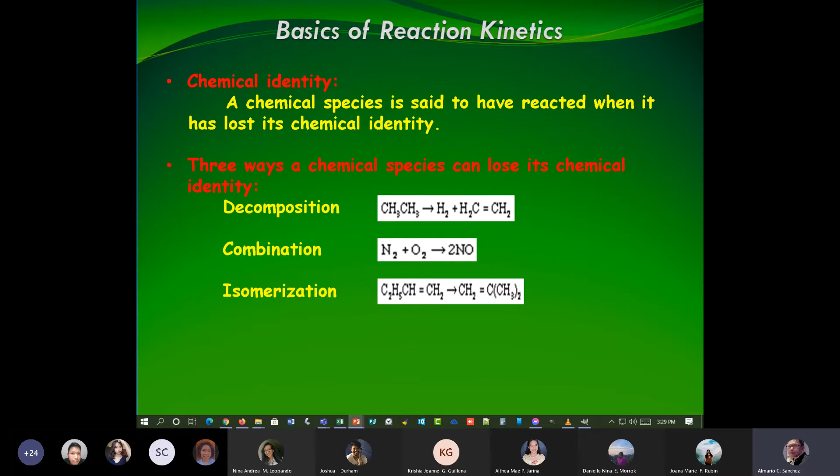So a chemical reaction is a process that leads to the transformation of one set of chemical substances to another.

How can we count them? We are going to use moles. Grams are also important. Then we have molar mass, then Avogadro's number. So these are the things we are going to deal with: grams, moles, molecules.

Remember that before reaction is the lowest picture. It undergoes reaction and then we have what is called after reaction.

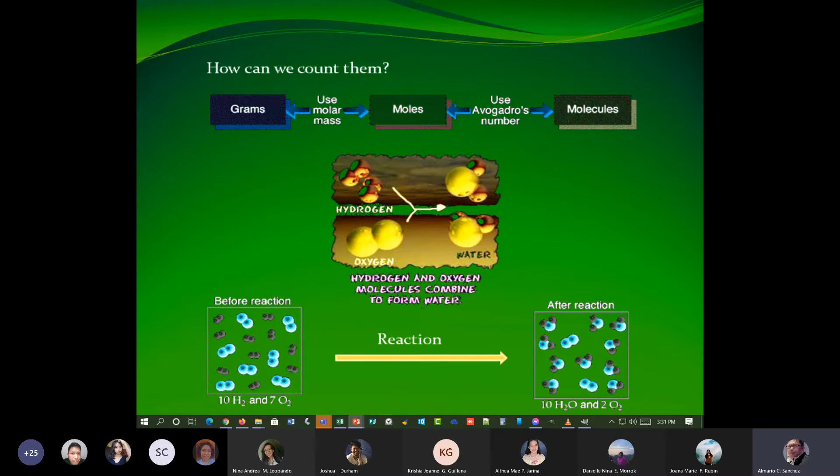So the basics of reaction kinetics. For example, we have A forming B. In other words, our reactant is A, and our product is B.

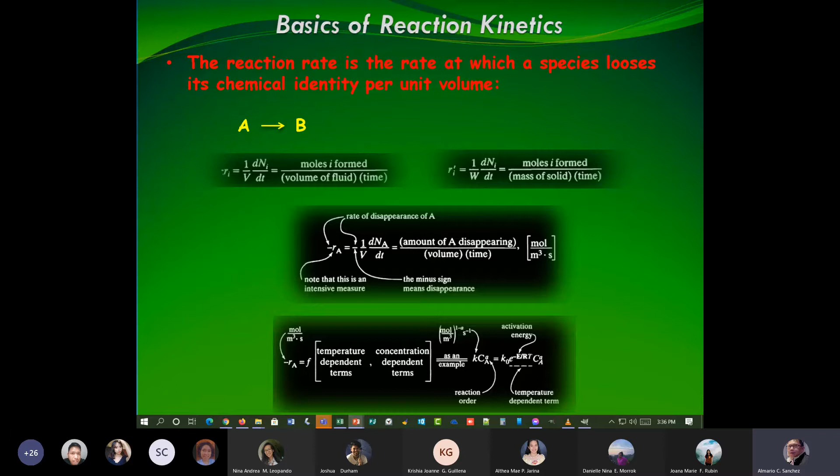Remember that the activation energy is the energy needed for a reaction to take place. Okay? And remember that the higher the activation energy, mas lisod ka maka produce og reaction, no? Imo sa na siyang paubson, pagamyan ang iyahang value sa atong activation energy. Okay? And it is temperature dependent, no? So, mao niya pinaka equation niya. We will derive that later on. No? Okay.

So, I have here embedded some videos. Duha ni ka video, siguro mga 30 minutes na siguro. Okay. About chemical engineering. Then later on, mobalik ta sa atong reactor, no? Okay, which is part of our discussion.

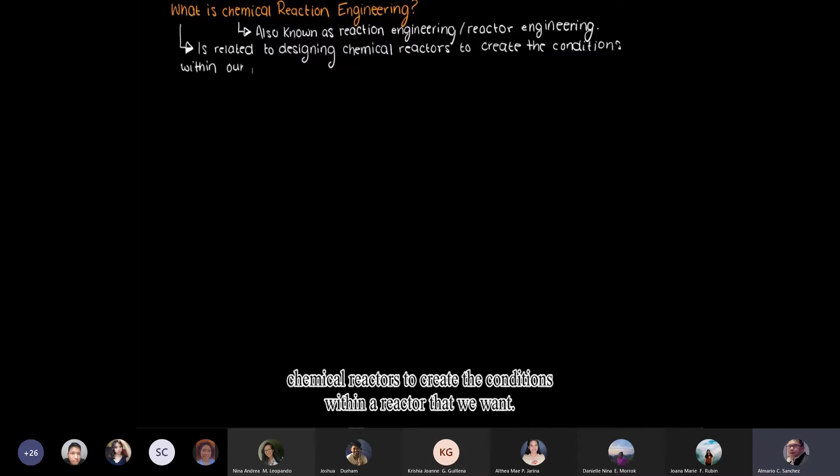Hi everyone, in this introductory video, I want to talk about what exactly chemical reaction engineering is and why learning this topic is important. This course is also sometimes known as reaction engineering or reactor engineering. So what exactly does chemical reaction engineering mean? It is basically the study of reaction kinetics, the rate and direction at which a reaction occurs, and the study of the reactors in which the reactions actually take place.

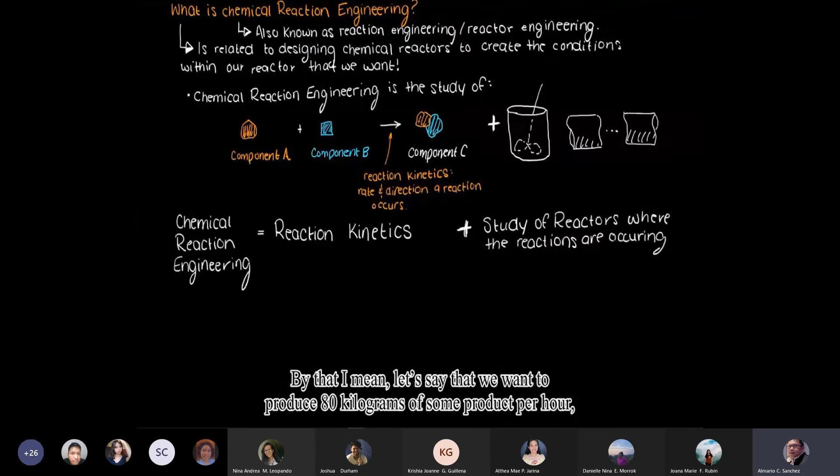Let's say that we want to produce 80 kilograms of some product per hour. What kind of reactor should we use? What temperature so that it doesn't explode? The primary focus is reactor design, such as will a certain exothermic reaction melt our reactor. Economics are also a huge part. And how do we scale a process from a pilot scale to an industrial setting?

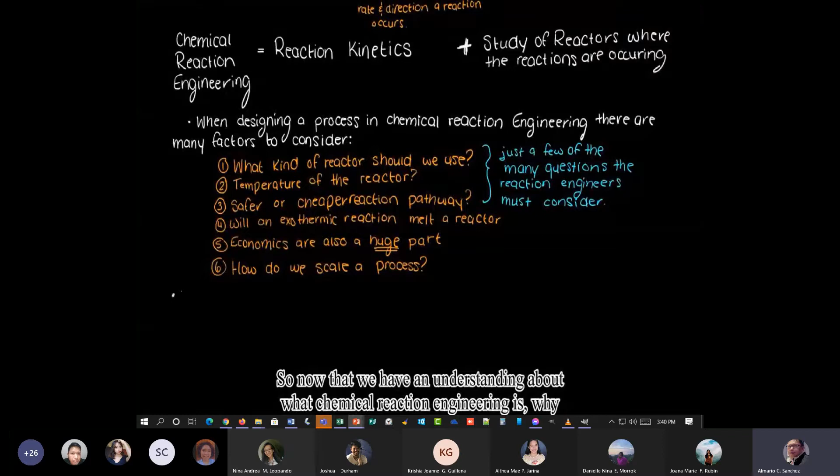So, now that we have an understanding of what chemical reaction engineering is, why is it important to learn about? Well, if you're watching this video, you're likely an engineering student, an engineering professional, or someone else interested in learning about reactor engineering. But why is it important?

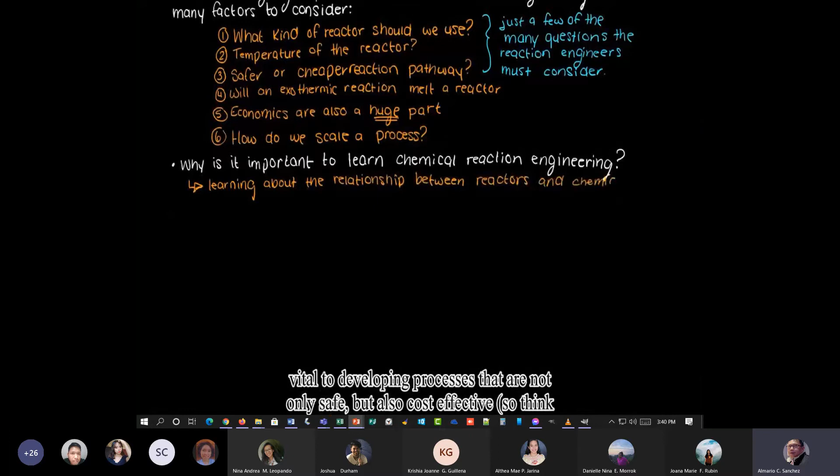Learning about the relationship between reactors and chemical reactions is vital to developing processes that are not only safe, but also cost effective—think heating and cooling costs—and has minimal environmental concerns. Does our process produce some environmental degrading byproducts?

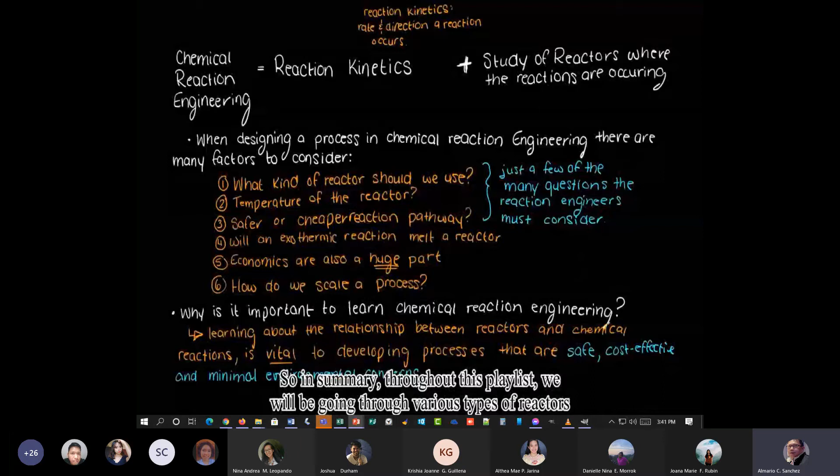In summary, throughout this playlist, we will be going through various types of reactors and how we can size them for certain desired products, through identifying and applying appropriate reactor design equations and methods. There will be lots of interesting topics covered throughout this playlist, and by the end, you should have a strong understanding of chemical reaction engineering basics.

Thank you for checking out this video, and I hope it helped your fundamental understanding about what chemical reaction engineering is, and inspires you to continue learning about this topic with us throughout the duration of this playlist.

Hi everyone, in this introductory video, I want to talk about what exactly chemical reaction engineering is.

What's up, guys? It's time to start our course in reactor engineering. We are now in block number 1, which is essentially chapter 1 on your book, Fogler's book, Elements of Chemical Reaction Engineering.

We're going to see the introduction and the molar balances. We're going to explain what's a molar balance, how to do it, how to apply it to a reactor, and essentially we're going to find out some equations or design equations for those reactors.

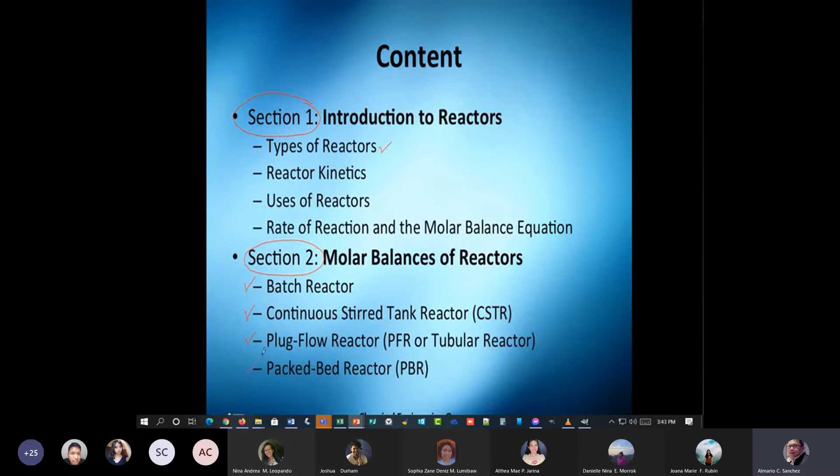In the second video, we're going to jump to molar balances, which are done essentially in batch reactor, continuous stirred tank reactor, plug flow reactor, and packed bed reactor. Right now, we're going to see just the introduction to reactors.

So the first thing I want to let you know is what's a reactor. I tried to look out for many definitions, but I think the most common sense definition is this one: it's an equipment used to carry on a chemical reaction.

So essentially, if you have a mixing unit and you're not doing a chemical reaction, that's not a reactor. But if you are carrying on, say, A turns into B, then you are doing a chemical reaction, therefore that's a reactor. And actually, there's also types of pipe.

If you're using a pipe just to transport material and you're not transforming A to B, technically speaking this isn't a reactor. Of course, we don't want that—we want this pipe to transport A into, of course, only A. We don't want transformations. But technically speaking, if you have a device or equipment that carries out a chemical reaction, then you have a reactor.

So yes, chemical engineers design reactors to maximize net present value for the given reaction. That's kind of fancy. What does that mean? It means essentially you want to improve the reaction in...

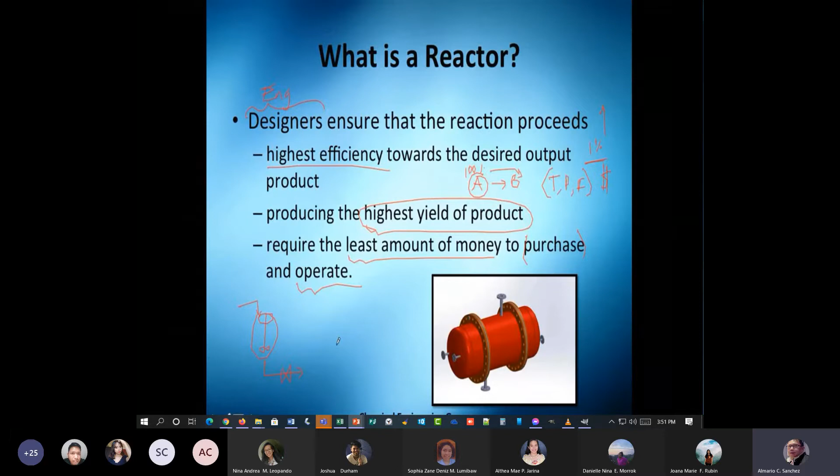And you need the least amount of money to purchase or invest and to operate, because one thing is having the reactor, another is actually operating it. You'll need someone there taking care of it, someone who cleans, someone who operates and controls temperature, heating, cooling, piping, pumping, compression—all that stuff behind the operation.

So why do we need reactors? Well, we want to convert material. That's what I love about chemical engineering: it's about transforming, converting, producing materials which aren't that useful, or maybe they are useful, but you want to turn them into something else.

So let's say you have this low-value material, and I love it because you use your knowledge, your brain, and transform it into more profitable materials. That's why I love chemical engineering—let's do some magic with our knowledge and get more money with that.

We do it because we want a specific unit for that operation, so at least we know that this tank is where our chemical reaction is taking place. If you're in this chemical plant and you have a problem—you're not getting the yield or conversion you want—you go to the reactor, you study it there, you don't need to check this piping or that one. Maybe eventually, if the reactor is fine, you'll need to check elsewhere, but the first thing you want to do is go directly to the reactor.

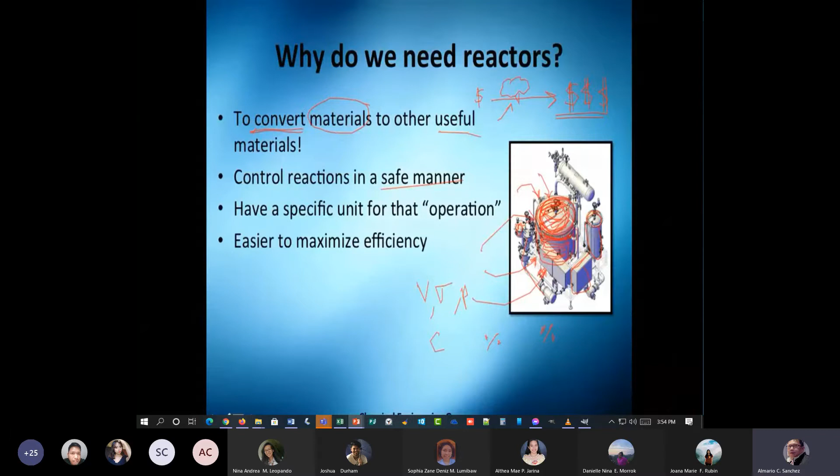And the thing here is that it's easier to maximize efficiency, because then you work fully on this reactor and not on the whole plant. You can change the volume, temperature of flows, pressure of flows, concentration—all those process variables that affect the conversion rate or yield. So that's pretty cool, because you can change levels, temperatures, inlet conditions, all within this specific unit.

So the next thing we're going to see is the types of reactors. There are many types of reactor, or ways to classify them, so I brought you the most common ones, the ones you're going to be using. For example, batch, or semi-batch process, or a continuous process.

This is in general when you have a plant operating all day, all year long. You transform A to B in this reactor, and you have a flow of 10 kilograms per hour here, and you take out 10 kilograms per hour of B. A batch is essentially just a tank that you fill up, let time pass, it reacts, and you take it out. A semi-batch is a mixture between a batch and a continuous process.

That's one form. Another type of reactor classification is whether it's catalytic or not catalytic. When it's catalytic, as the name implies, you have a catalyst. When you don't have it, it's a non-catalytic reaction.

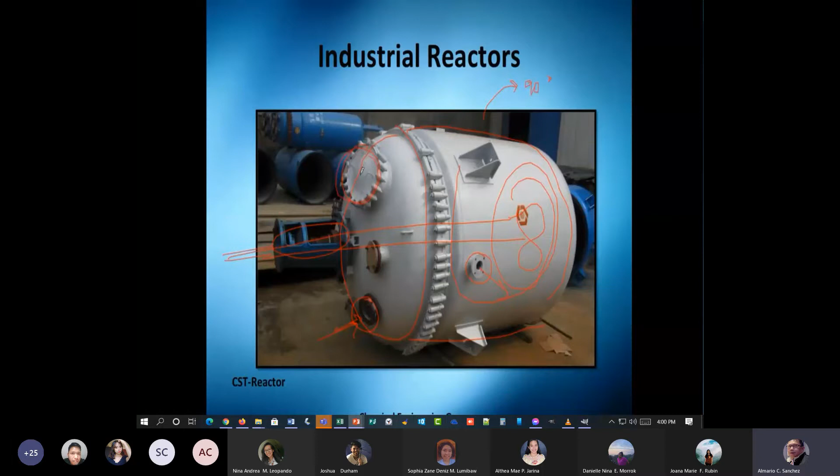As you can see, it's a continuous stirred tank reactor because you have the inlet here and maybe the outlet — I don't see the outlet, but it should be there. And this is the manhole. What's a manhole? It's essentially a place where a man can go in to clean it, or check if there's something stuck.

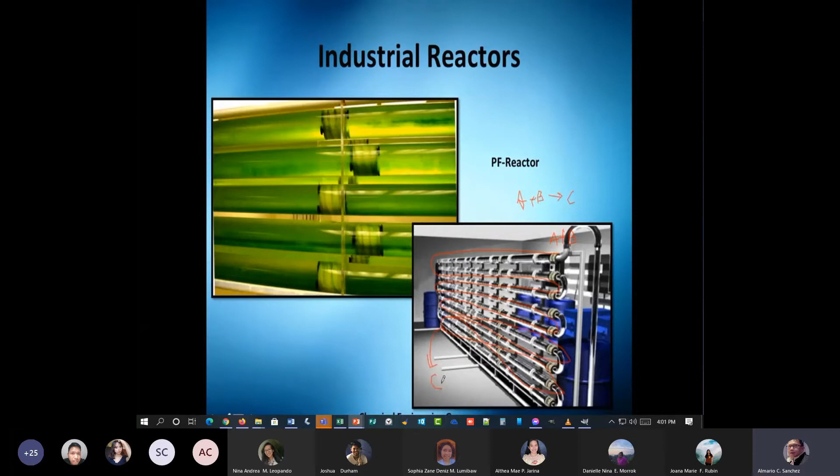The same here. Now we have a different arrangement, and you actually cover this, so maybe it's more aesthetic. Maybe if you're selling the reactors, you want to make it as aesthetic as possible. But actually in the chemical industry, you're not looking that much into aesthetics. You are more into usefulness, efficiency, and that.

And it makes sense, because if I were an engineer, I wouldn't care that it is not fashionable at all. If it works, it turns my material A into B, and I can sell B way more expensive, I will not care about the fashion elements.

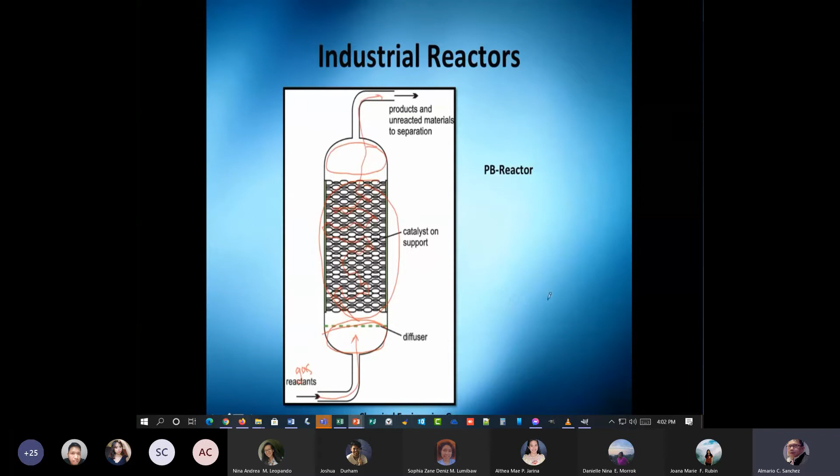And then we have a packed bed reactor. It's essentially the same tank. This is the diagram, because if I give you the photo, you will not be able to see the packing, of course, because it will be covered by metal walls. You have the reactants, you take them here, maybe this is gas. And this is a catalyst. You have the catalyst on this bed or this solid part, so they react, they make their reactions, and you take out the products. It's not as difficult or complex as it seems. It's so easy.

And obviously it depends on what your requirements are on pressure drop. You want to increase conversion, to increase the surface area. There are many things that you might want to consider. It's not just about, okay, just pull them up here.

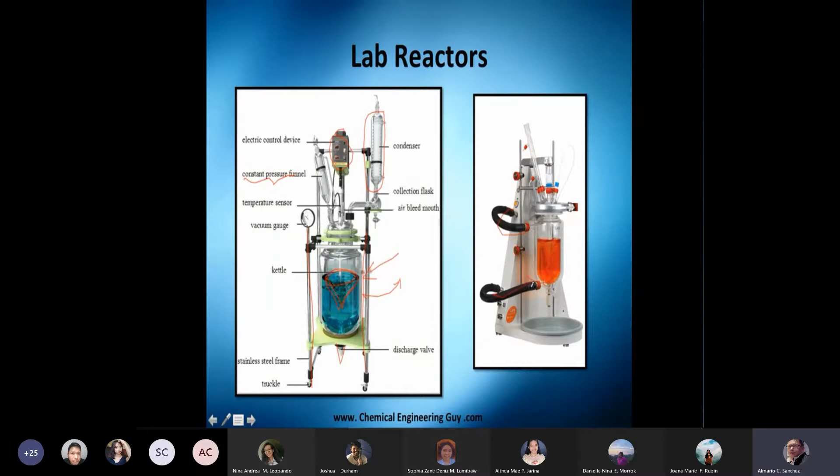And as you can see, this is done to improve the reaction. So if you can improve them in the lab, you can maybe improve them at the larger scale. Normally you use chemists or even chemical engineers to improve the reaction. The thing here is that you want to improve the yield, or maybe you want to lower temperature or heat requirements or viscosity, so you get lower pumping costs. All these things that might interest you are here.

And normally you also want to model that. So if you can model the lab experiment, you can see the transport phenomena. Let's say this is the heat or temperature profiles. These are momentum or velocity profiles; you can see all the agitation here. And maybe this is the mass profile, how they're changing.

Let's say the blue one is A and the red one is B, and A is turning into B. So you can see how at the beginning you have a lot of A and at the end you have a lot of B, which makes sense because you are transforming A into B. So that's why you also get lab reactors. You want to improve and model and eventually get a better version of your real reactor in the chemical industry.

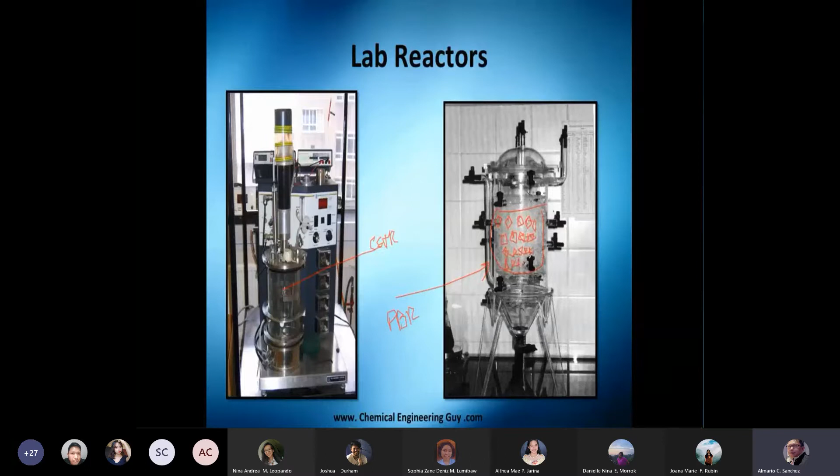So same thing here. You can recognize them. Maybe this is a small-scale CSTR, and this is a PBR, of course. You have this packed bed. As you can see, you have a lot of pellets, so I'm guessing this is a packed bed in which you feed the gas here and take it out. So yeah, same thing here. Actually this is also a packed bed reactor, but you can only see the packing here, you need to be watching closely. And essentially that's lab reactors.

We're going to see a new trend, which is micro reactors. Essentially, as the name says, micro, 10 to the minus 6 meters. So why do we use this? Because at the micro scale, we get many good things. You can control better. Essentially, it's all about transport phenomena.

Hopefully you've seen that before, because you get laminar flow and you get more pressure control and heat control and all that stuff. And yeah, you can see another here. You get better control of the reactants. And the thing here is, once you've got this microreactor working as you wish, you can get maybe 10 to the 6 units, which is about 1 million, or maybe you just want 1,000, depending on the flow, of course, and your requirements.

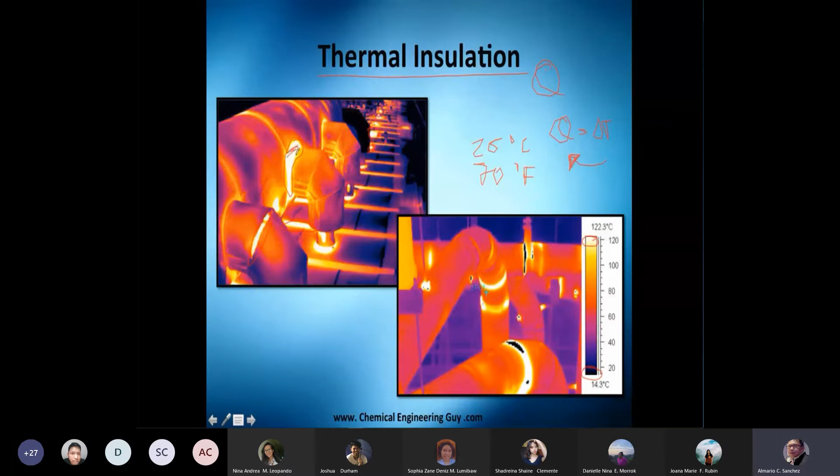You don't want high temperature, because it implies a difference in temperature, and that means you're going to lose heat to the ambient air. You want to avoid all these little points here. How do you do that? By thermally isolating the reactor. Instead of losing all the heat, you cover the reactor, the inlets and all the piping, and you get this kind of arrangement. All these pipes are covered. This is not metal, this is isolating material. And you also cover the heating vessel.

What type of material is used? They use a lot, but this is how they look: foam-like or asbestos-like, and you cover it with aluminum. That's essentially thermal insulation. I remember going to my first chemical industry, and I thought these were the whole pipes. There are actually pipes inside, but you've got this isolation inside the metal. So the actual pipe may be this size. Even though you see a huge tube, there's a small tube inside because it's super hot, with all this material around it.

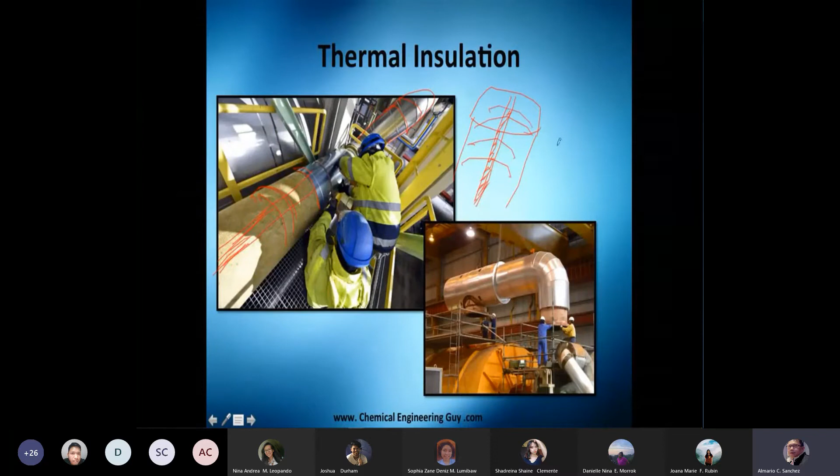So that's an overview of thermal insulation, so you know there are isolation problems in reactors. If you want to keep the same temperature, isothermal, you will need to take care of that. Or if you simply don't want to spend that much money on heat requirements, you will need to buy some isolation material. And that's everything for section number 1.

Let me tell you what we've seen so far. We saw a small introduction to reactors, types of reactors, reactor kinetics, and the uses of these reactors. What's left is section 2, molar balances of batch reactors, continuous stirred tank reactors, plug flow reactors, and packed bed reactors. We're going to see the mathematics and derive an equation to help us model these 4 reactors.

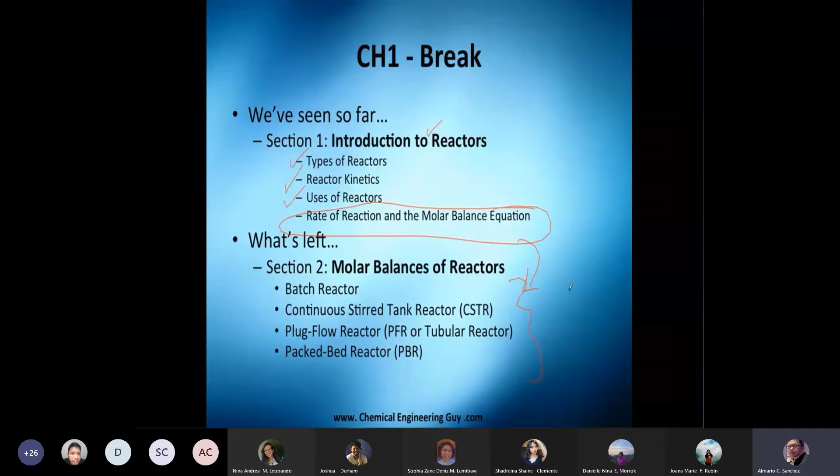What's up, guys? It's time to start our... Okay.

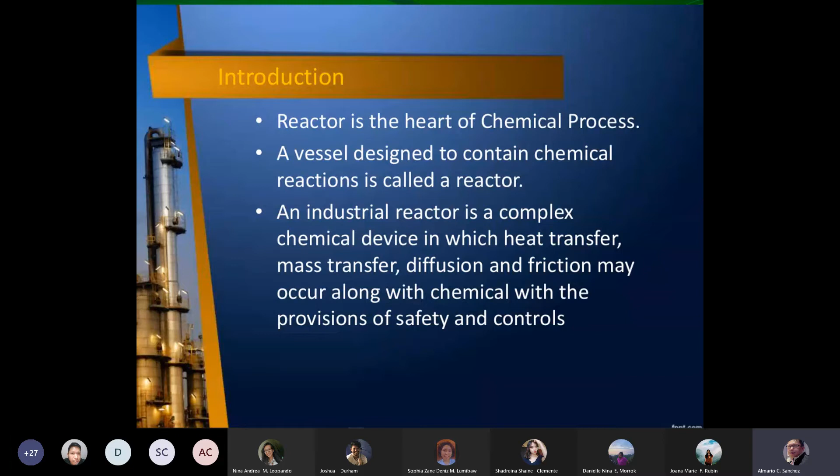So the basic principle is that all chemical processes are centered in a chemical reactor. The design of a chemical reactor is the most important factor in determining the overall process economics. So just bear in mind that you are called a chemical engineer because of these things. You know how to make a chemical reactor. You know how to design, not only designing by name, but you design it for the purpose that you profit from it. You can make something that is not useful into useful, and also it is safe. It is a safe reactor.

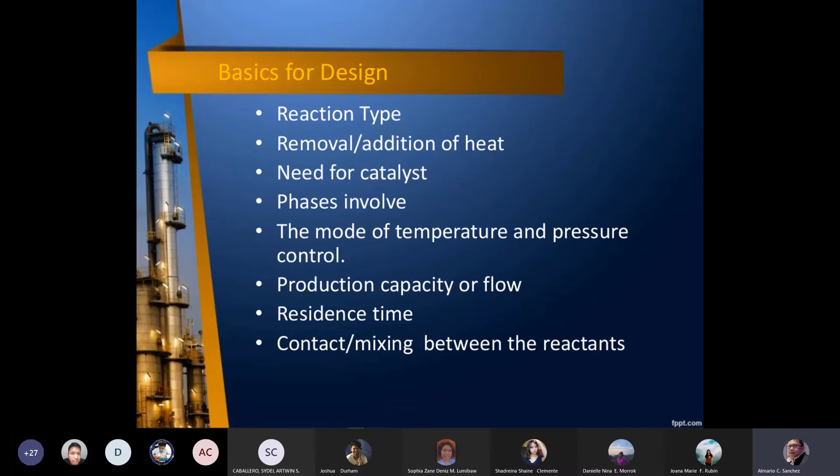So kini nga mga basic need na to for the designing of a reactor. Actually this is only the basic. There are many things to consider pa ang thermodynamics niya. Kinahanglan nato na.

So the reaction types, we already know this from general chemistry. We have the direct combination or synthesis reaction, which is A plus B equals AB. Then the chemical decomposition or analysis reaction, reactant is AB, and then it decomposes into A and B. We are talking about this reaction type because this is one of our bases when we design a reactor.

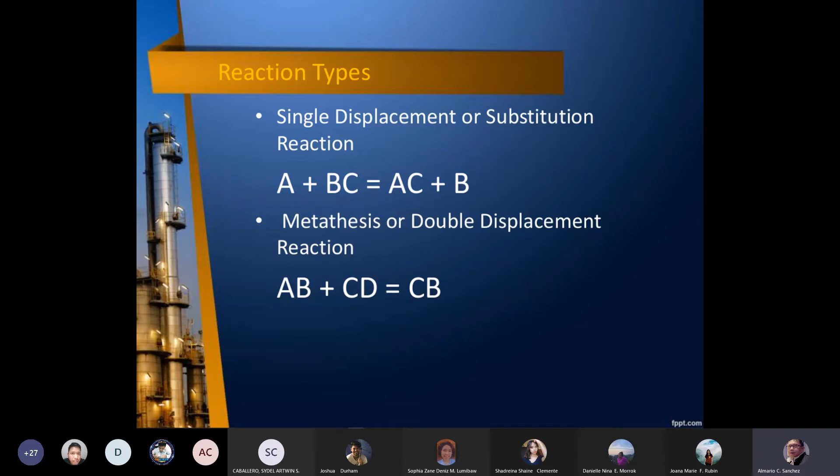Then we have single displacement or substitution reaction. So we have an element A and a compound BC. Then by single displacement or substitution, A combines with C, and then B. Then metathesis or double displacement reaction, AB plus CD reactant equals CB plus AD. Siguro ang importante nga part is the CB only. The AD is not important.

In addition, the basic data includes thermodynamics, heat and mass transfer characteristics, physical, chemical, and thermodynamic properties of components taking part in the reaction, corrosion, aeration, characteristics of any potential hazard associated with the reaction system, and the reaction rate. Very important ang reaction rate. Unsa siya kakusog, unsa siya kahinay. Basig usa ka tuig pa maka-produce ang imong reactor.

Then we have to consider also the endothermic or exothermic reactions. Endothermic describes a process or reaction that absorbs energy in the form of heat; exothermic releases energy in the form of heat, light, or sound. Then we are going to solve also for the change in enthalpy and the change in entropy. One thing very important: as much as possible i-avoid nato ang exothermic reaction. You will understand later why.

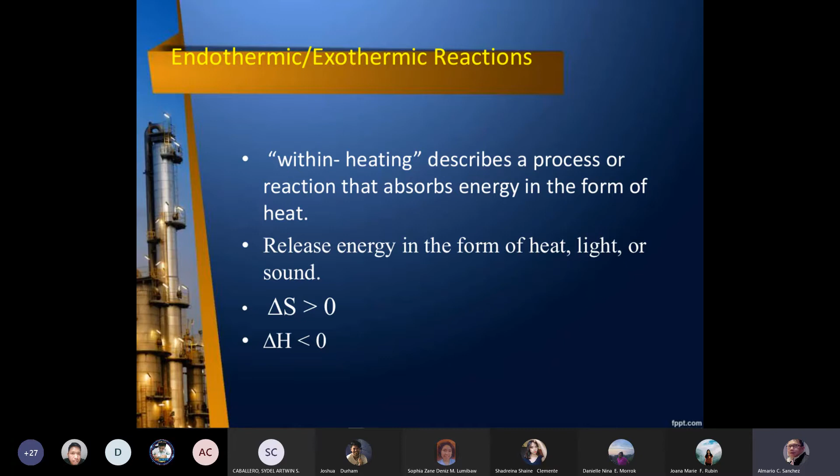Now reaction rate, the speed at which a chemical reaction proceeds in terms of amount of product formed or amount of reactant consumed per unit time. So you have to remember these things. Importante ni siya, regarding the kinetics. Kay mao man ni ang pinaka basis nganong kana nga reactor atong gamiton, nganong batch type, nganong CSTR, nganong PBR atong gamit. Depende na lang sa reaction rate.

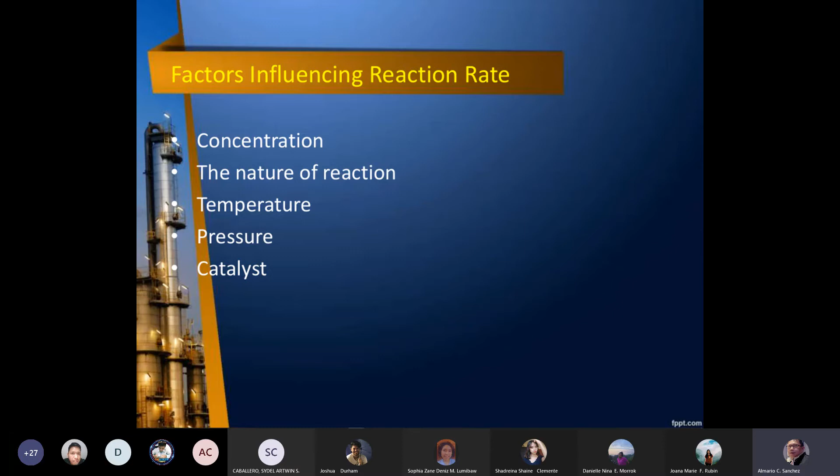Factors influencing reaction rate: concentration, the nature of reaction, temperature, pressure. Ang catalyst, option lang ni siya. Catalyst, gamiton lang nato kung dili mo suffice ang production sa atong need. Remember that using a catalyst, that is money, mo gasto na sad ta. So as much as possible atong i-avoid siya. Kung kaya nato makaproduce og reaction without using a catalyst, so be it.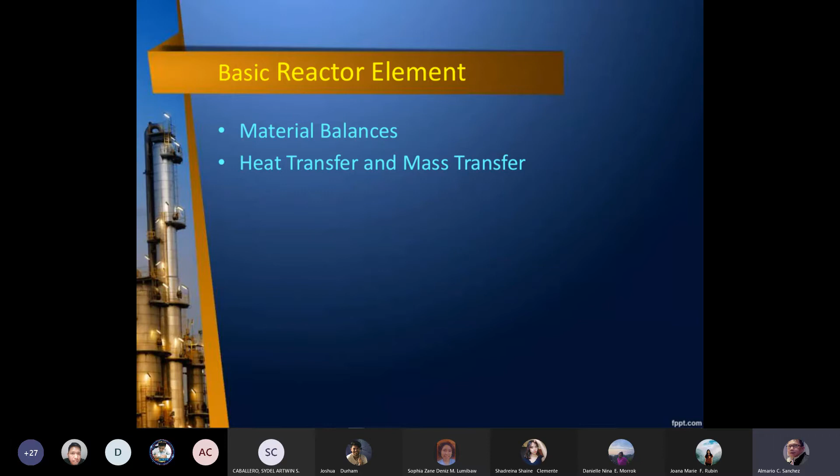Then material balances is also called mass balance, no? Mass in is equals to mass out na siya. So, conservation of mass, no? It's an application of conservation of mass to the analysis of physical system. The mass that enters a system must, by conservation of mass, either leave the system or accumulate within the system. Okay?

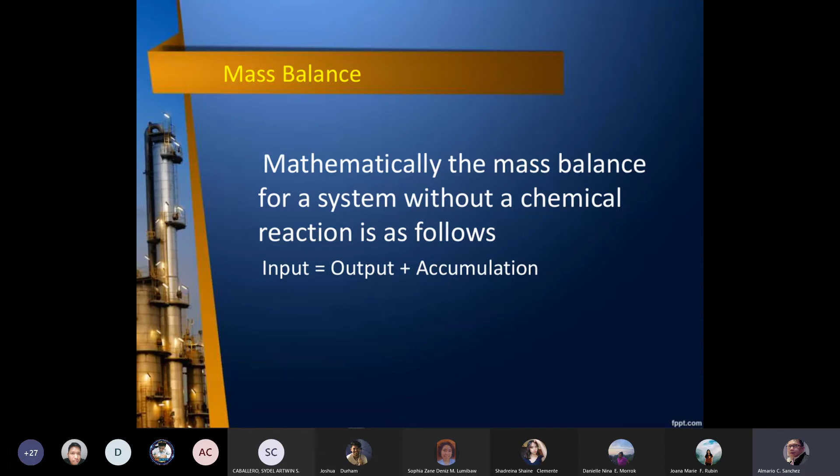So, mathematically, the mass balance for a system without a chemical reaction is as follows. Input is equals to output plus accumulation. Wala na chemical reaction. How about kung doon ay chemical reaction? Okay.

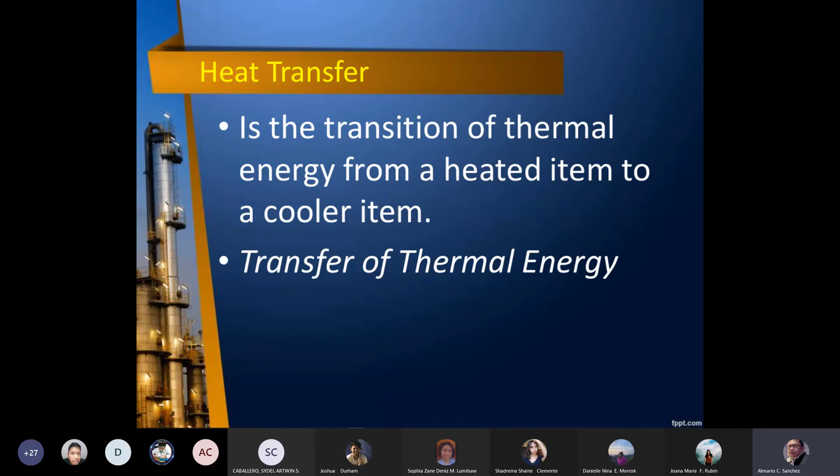The modes of heat transfer kinahanglan nato niya is jacket, no? Jacket meaning to say kanang insulation, no? Then internal coils, then the external heat exchanger. So we have cold water niya ato siyang pabugnawon gamit ang jacket kun dili heat exchanger, no? Then we have cooling by vapor phase condensation. So when we said vapor phase condensation, you are going to change the pressure, no?

Then, sa pag-heat pod, we have fired heater. So internal coils is heat, fired heater is heat, external heat exchanger is cooling, jacket is cooling, vapor phase condensation is cooling.

Okay, so we have the basis for our reactor design, no? Okay, so reactors ang atong design niya upat kabuk ang atong basis: mode of operation, end use based classification, the phase based classification, and the catalyst base, no. Mode of operation gani kung design tag reactor niya atong gamiton sa ato ang pag-design is the mode of operation. So mangutan na tag unsa nga type nga reactor na, is a batch type, is it a continuous type or a semi batch. Kung atong basihan is the end use based classification, so it is polymerization reactors, biological reactors, or electrochemical reactors, depende, no? Or absorption reactors or extraction reactors. Depende lang sa end use based classification.

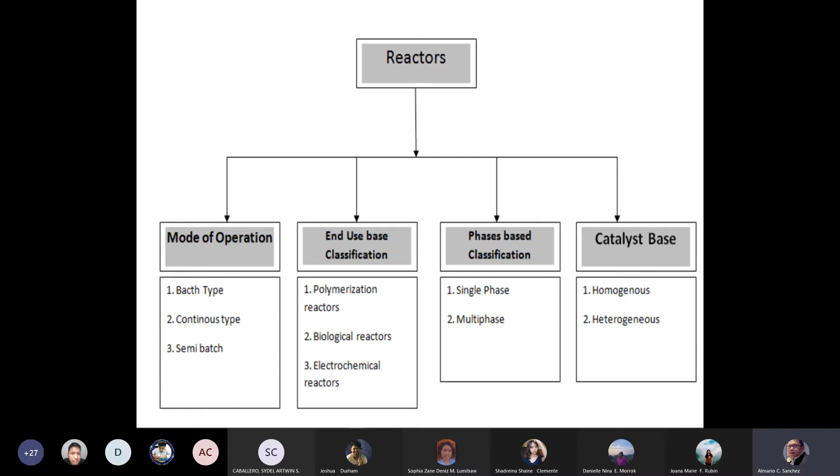We can also do the phases based classification. So, is it a single phase or a multi-phase? Na agi na siguro ninyo ang liquid extraction, no? And also the last basis for the reactor choice is the catalyst base. Is it homogeneous or heterogeneous? Kung kining catalyst base siyempre maggamit ta og catalyst, catalytic, okay? So the reactor types can be classified according to the mode of operation, end use application, number of phases, and if a catalyst is used, whether it is homogeneous or heterogeneous. Okay, so mao ni ang reactor type, mag-basis ta kung unsang klase sa reactor atong gamiton.

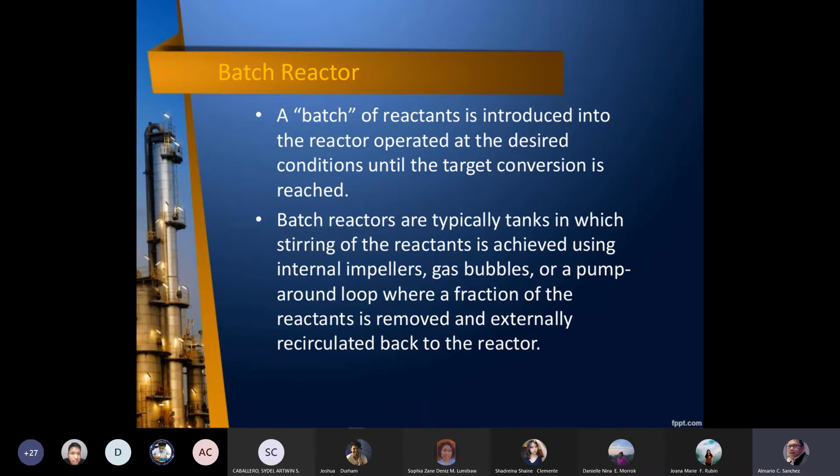In a batch reactor, reactant is introduced into the reactor and operated at the desired conditions until the target conversion is reached. Batch reactors are typically tanks in which stirring of the reactants is achieved using internal impellers, gas bubbles, or a pump around loop, where a fraction of the reactant is removed and externally recirculated back to the reactor. So temperature is regulated via internal cooling surfaces such as coils or tubes, jackets, reflux condensers, or a pump around loop that passes through an exchanger. So gi-control ang temperature, gi-control tanan. React siya tanan with these parameters. Now batch processes are suited to small production rates, long reaction times to achieve desired activity, and flexibility in campaigning different products. So dugay gid siya, that's why tawag siya batch reactor.

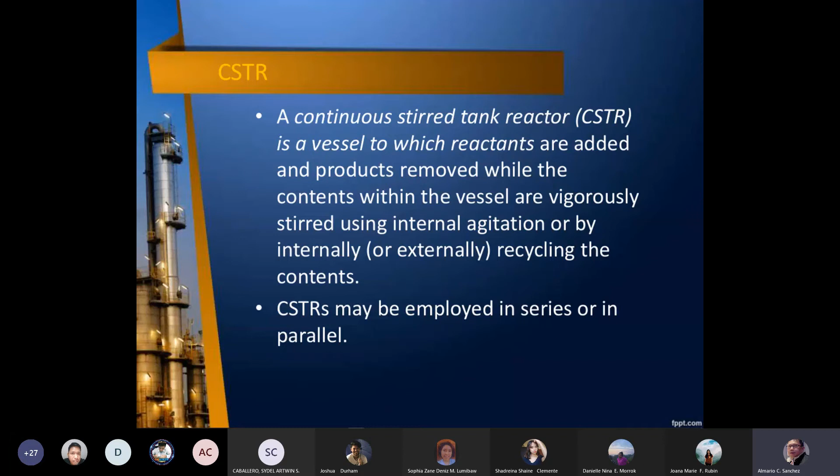Residence time: the average amount of time a discrete quantity of reagents spends inside the tank. How do you compute this? Volume of the tank divided by volumetric flow rate. So that is the residence time—volume of the tank divided by volumetric flow rate.

At steady state, the mass flow rate in must be equal to the mass flow rate out. At steady state, meaning your input equals your output, there's no difference in your volume in the tank—the level stays permanently the same.

CSTR applications: continuous stirred tank reactors are most commonly used in industrial processing, primarily in homogeneous liquid phase flow reactions where constant agitation is required. They may be used by themselves, in series, or in a battery.

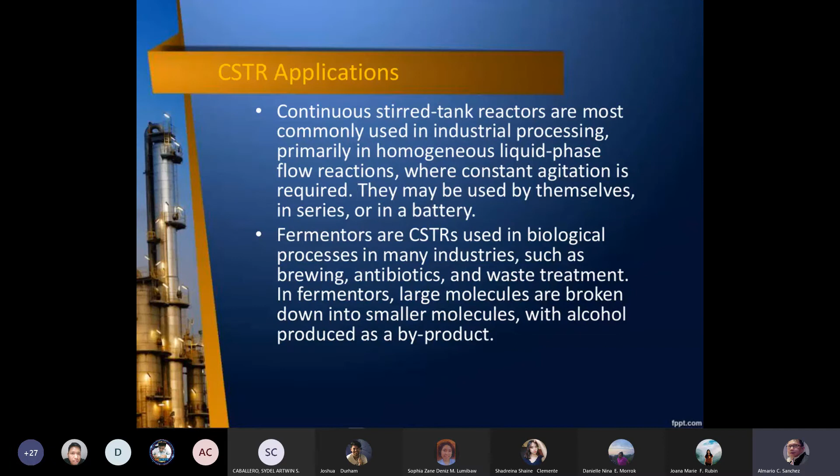Fermentors are CSTRs used in biological processes in many industries such as brewing, antibiotics, and waste treatment. In fermenters, large molecules are broken down into smaller molecules, with alcohol produced as a byproduct—that's a catabolic process.

Advantages and disadvantages of CSTR: good temperature control is easily maintained since it's continuous. It's cheap to construct—like a pipe connected to a big tank with an agitator, making the reactor design easier. The reactor has a large heat capacity, and the interior of the reactor is easily accessed.

The disadvantage is that conversion of reactant to product per volume of reactor is small compared to other flow reactors. That's why it's not 100%—you can't reach 100% because, since it's continuous, the output goes straight out before it's fully 'cooked.'

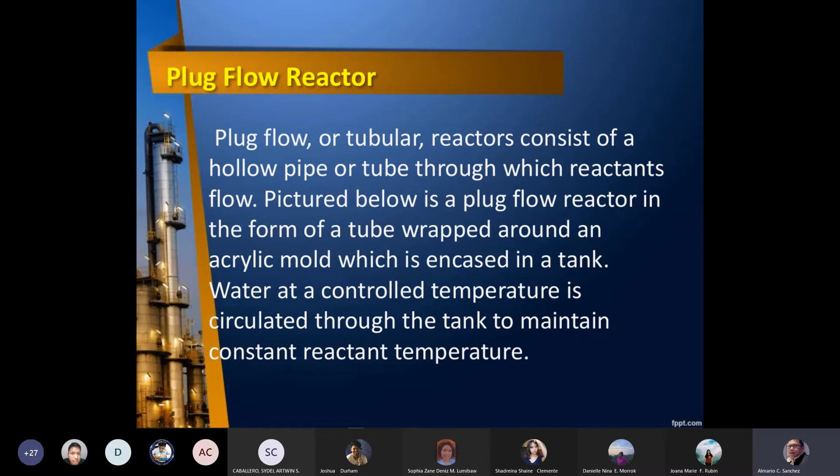Water at a controlled temperature is circulated through the tank to maintain constant reactant temperature. It can be wrapped with another small pipe carrying cold water to control the temperature.

Again, in a plug flow reactor, reagents may be introduced into the reactor's inlet. All calculations performed with PFRs assume no upstream or downstream mixing—so it flows straight through. It has higher efficiency than CSTR at the same volume because it has a longer path, so it mixes better compared to CSTR.

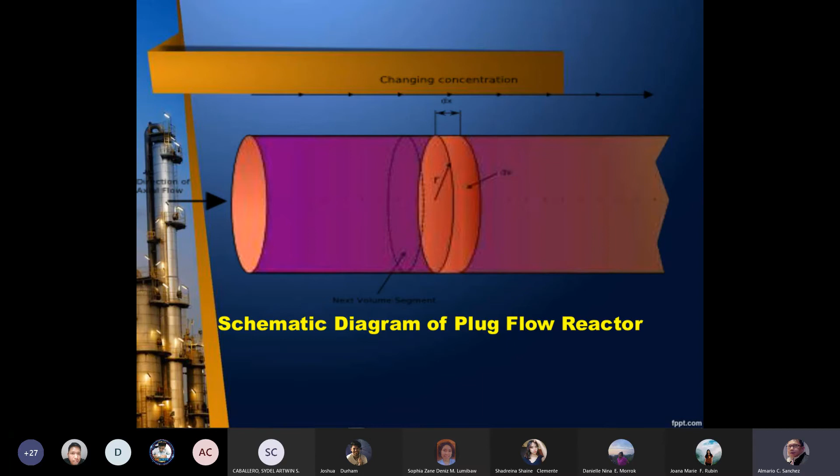Now, applications of the plug flow reactor—where is this applied? Plug flow reactors have a wide variety of applications in either gas or liquid phase systems. Common industrial uses of tubular reactors are in gasoline production, oil cracking, synthesis of ammonia from its elements, and the oxidation of sulfur dioxide to sulfur trioxide.

A tubular flow reactor is a tube or pipe through which reactants flow and are converted to product. The tubular pipe reactor may have varying diameter along the flow path—it's not necessarily the same diameter throughout; it can change repeatedly.

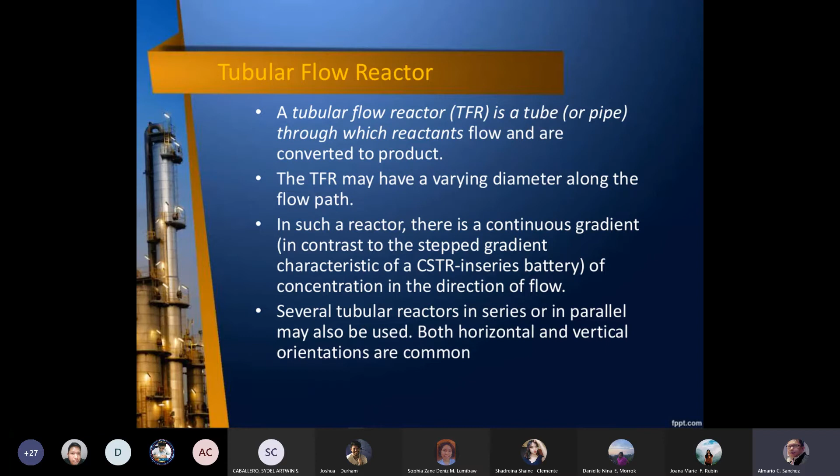In such a reactor, there is a continuous gradient in contrast to the stepped gradient characteristic of a CSTR-in-series battery of concentration in the direction of flow. Several tubular reactors in series or in parallel may also be used. Both horizontal and vertical orientations are common, though horizontal is more commonly used rather than vertical.

Chemical reactions take place in a stream of gas that carries reactants from the inlet to the outlet. The catalysts are in tubes. Uniform loading is ensured by using special equipment that charges the same amount of catalyst to its tube at a definite rate.

The semi-batch reactor: some of the reactants are loaded into the reactor, and then the rest of the reactants are fed gradually. Alternatively, one reactant is loaded into the reactor, and the other reactant is fed continuously. Once the reactor is full, it may be operated in a batch mode to complete the reaction.

Semi-batch reactors are especially favored when there are large heat effects and heat transfer capability is limited. Exothermic reactions may be slowed down and endothermic reactions controlled by limiting reactant concentration.

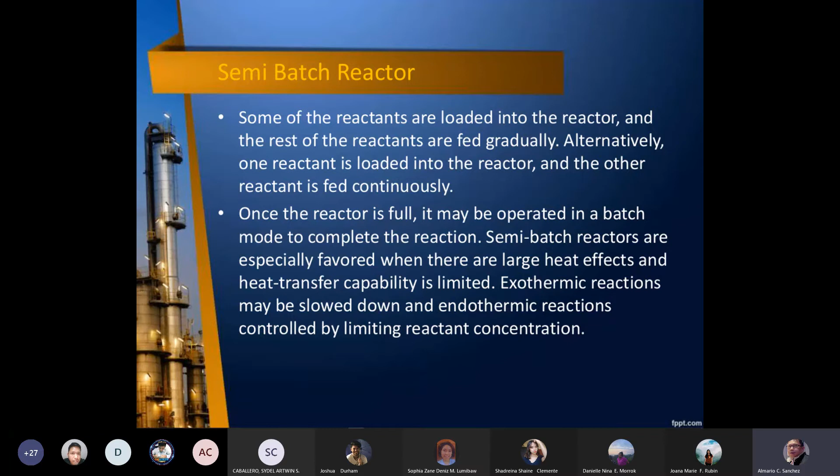In bioreactors, the reactant concentration may be limited to minimize toxicity. Other situations that may call for semi-batch reactors include control of undesirable byproducts, or when one of the reactants is a gas of limited solubility that is fed continuously at the dissolution rate.

Classification by end use: chemical reactors are typically used for the synthesis of chemical intermediates for a variety of specialty applications like agriculture or pharmaceutical, or commodity such as raw materials for polymer applications.

Still on end use: polymerization reactors, bioreactors, electrochemical reactors. Polymerization reactors convert raw materials to polymers having a specific molecular weight and functionality. The difference between polymerization and chemical reactors is artificially based on the size of the molecule produced. Remember, polymerization involves long chains of molecules, monomers into polymers.

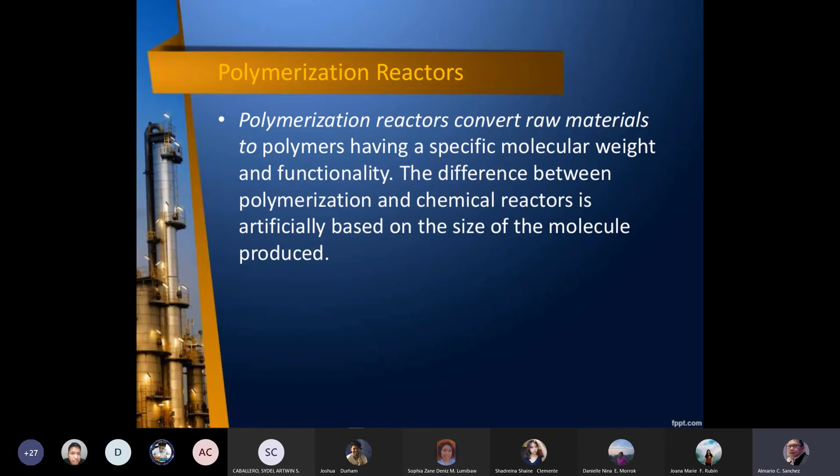Bioreactors utilize, often genetically manipulated, organisms to catalyze biotransformations either aerobically in the presence of air or anaerobically, without air present.

Now, electrochemical reactors use electricity to drive desired reactions. That's why they're called electrochemical reactors - they use electrochemicals. Examples include synthesis of sodium metal from sodium chloride and aluminum from bauxite ore. This is electrolysis.

A variety of reactor types are employed for specialty material synthesis applications, like for example electronics, defense, and others.

Now the last one for us, classification by phase - not catalytic. Despite the generic classification by operating mode, reactors are designed to accommodate the reactant phases and provide optimal condition for reaction. Reactants may be fluid or solid, and as such, several reactor types have been developed.

Single-phase reactors are typically gas - mostly gas or plasma, or liquid phase reactors. Two-phase reactors may be gas-liquid, liquid-liquid, gas-solid, or liquid-solid reactors.

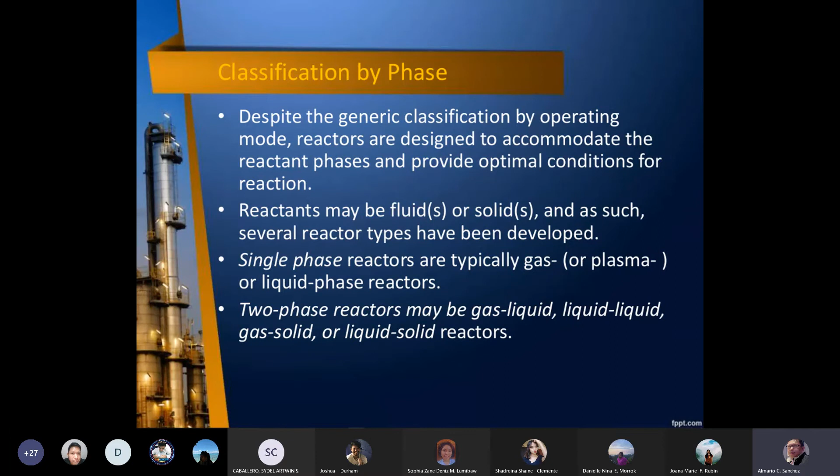Multi-phase reactors typically have more than two phases present. The most common type of multi-phase reactor is a gas-liquid-solid reactor. However, liquid-liquid-solid reactors are also used. The classification by phases will be used to develop the contents of the section.

In addition, a reactor may perform functions other than reaction alone. Multifunctional reactors may provide both reaction and mass transfer - for example, reactive distillation, reactive crystallization, reactive membranes, or reaction and heat transfer. This coupling of functions within the reactor inevitably leads to additional operating constraints on one or the other function.

Multifunctional reactors are often discussed in the context of process intensification. The primary driver for multifunctional reactors is functional synergy and equipment cost savings.

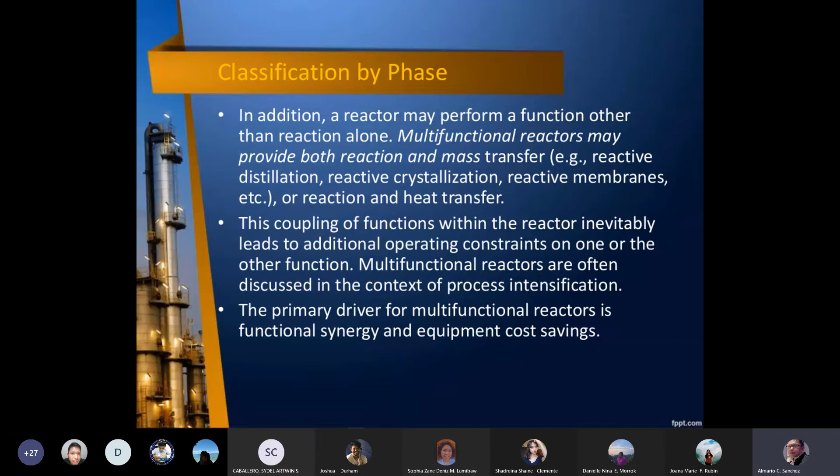So those are for the reactors. Then we will go to the vessels - there's a difference between vessels and reactors.

These are already the fundamentals. If you can see, part of our discussion is reactors and vessels. It's emphasized that we need to discuss these reactors or vessels because that's what we'll design - reactors. I will not discuss catalysts first; we'll bypass catalysis for now, and that will be on the third week.

So we'll go back to vessels. Once we finish the reactor topic, we move to vessels. Vessels are integral to the completion of products and services associated with the process unit. Materials are processed, treated, or stored within many different types of vessels.

Vessels enable the process industries to create and store large amounts of products for sale and distribution. Vessels such as tanks, towers, reactors, drums, dryers, filters, cylinders, hoppers, bins, and other similar containers are used to process or store materials.

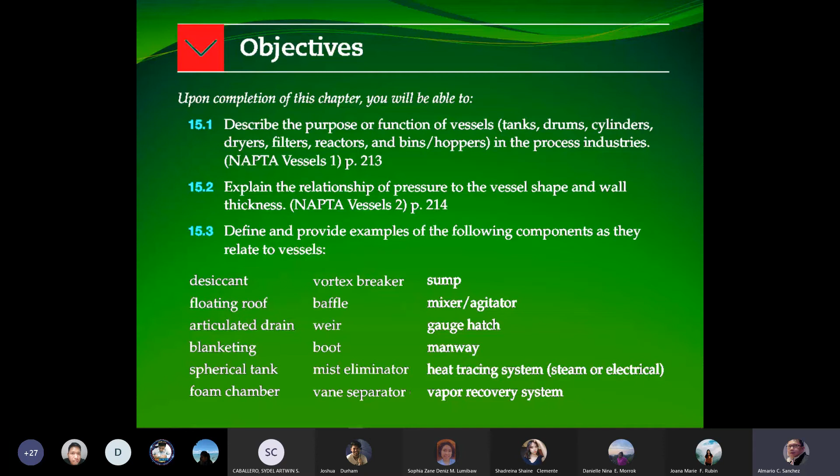We will be able to describe also the purpose of dikes, firewalls, and containment walls around the vessels.

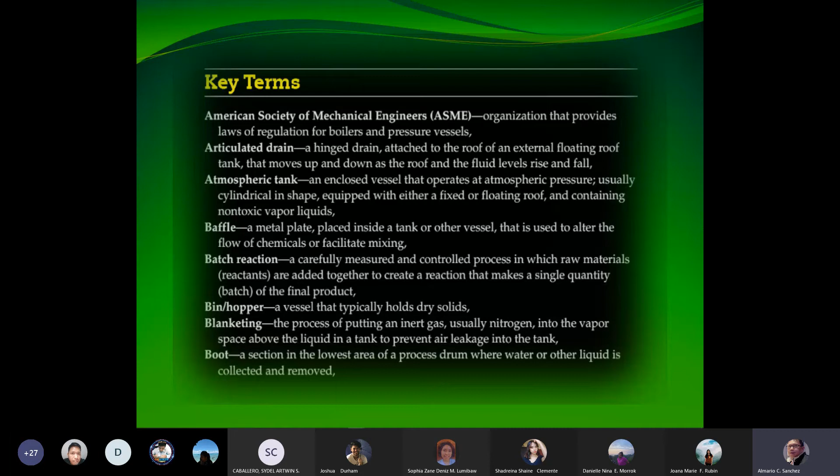Okay. Now, boot, a section in the lowest area of a process drum where water or other liquid is collected and removed. Okay. Containment wall, an earthen berm or constructed wall used to protect the environment and people against tank failures, fires, runoff, and spills. Also called a bund wall, bunding, dike, or firewall. So, that's the containment wall.

Then we have also what is called continuous reaction, a chemical process in which raw materials are continuously being fed in and products are continuously being formed and removed from reactor vessels. Then we have cylinder, a vessel that can hold extremely volatile or high pressure materials. Then desiccant, a specialized substance contained in a dryer that removes hydrates from the process stream. Okay.

Drum, a specialized type of storage tank or intermediary process vessel. Dryer, a vessel containing desiccant and screens across which process streams flow to have moisture removed. Okay. Filter, a device used to remove liquids, gas or solid particulates from the process stream.

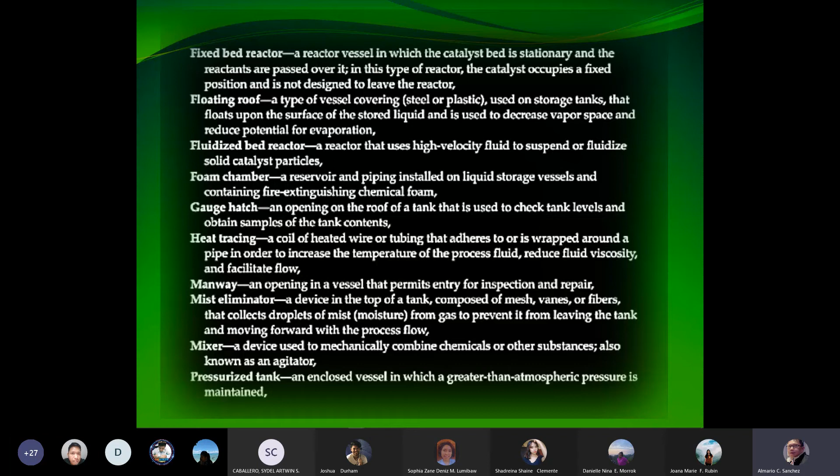Then, okay. Reaction furnace, a reactor that combines a fire box with tubing to provide heat for a reaction to occur inside the tubes. Reactor, a vessel in which chemical reactions are initiated and sustained.

Spherical tank, vessel ni, a type of pressurized storage tank that is used to store volatile or highly pressurized material, also referred to as round tanks. Okay. Stirred tank reactor, okay, reactor ni. A reactor vessel that contains a mixer or agitator to improve mixing of reactants.

Sump, it is an area of temporary storage located at the bottom of a tank from which undesirable material is removed. Okay. Mura siya pit kung nasa gawas, pero siya kana sam ginagmay ra siya pero para gyapon siya sa mga waste ng product, no.

Okay, tank, a large container or vessel for holding liquids and or gases. Tubular reactor, a continuously flowed vessel in which reactants are converted in relation to their position within the reactor tubes, not influenced by residence times in the reactor. Vane separator, a device composed of metal vanes used to separate liquids from gases or solids from liquids.

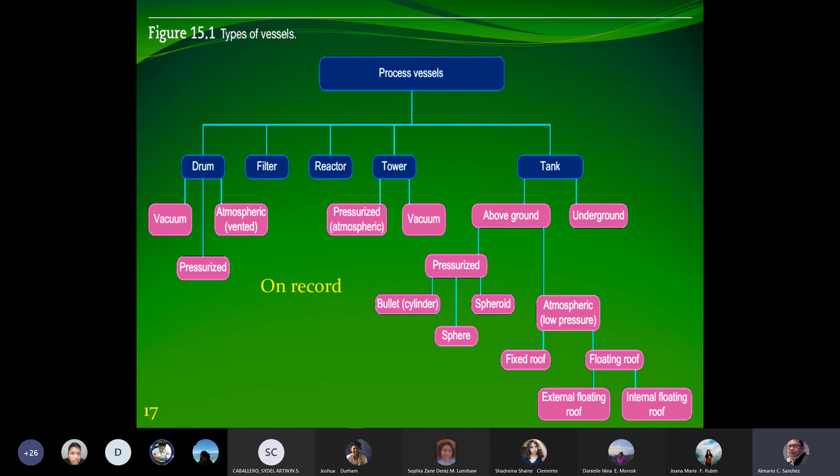Okay? We don't have an example of the tank, kasagarang tank nga nasa underground, ang kanarang mga gasoline tank, no? Ang gasolinahan na sila ang tayuta na sila gibutang for safety purposes, no? Okay? So, let's proceed. So, the purpose of vessels.

Vessels are used to carry out process operations such as distillation, drying, filtration, stripping, and reaction. These operations usually involve many different types of vessels, ranging from large towers to small additive and waste collection drums. Vessels are also used to provide intermediate storage between processing steps. They can provide residence time for reactions to complete or for content to settle.

A storage tank is a common type of vessel because every process requires containers to hold feed and other materials. Tanks are used for raw materials and additives, intermediate products, final products, and waste or non-recoverable off-spec products and byproducts. A drum is used for the collection and separation of material in processes, for storage and for the separation of materials before further processing. Drums operate either under greater than atmospheric pressure or under vacuum pressure.

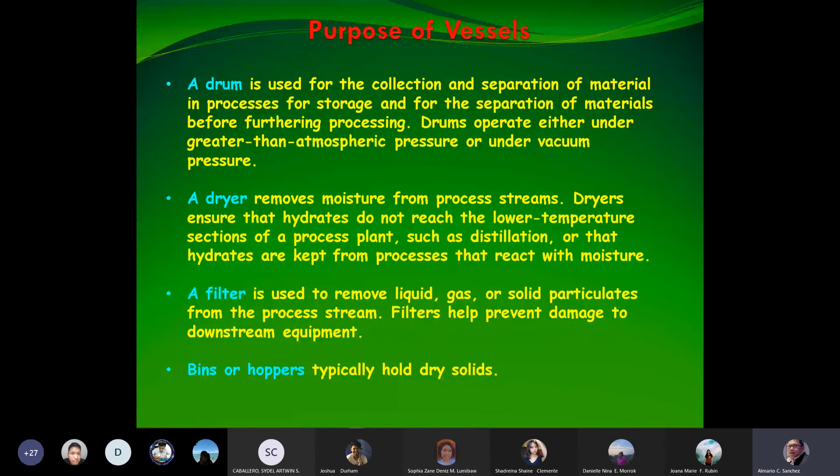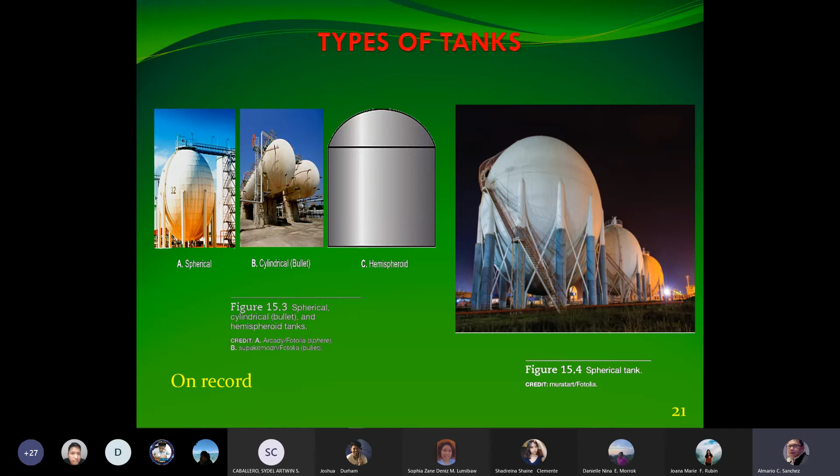Floating roof: a steel or plastic roof used on storage tanks. It floats upon the surface of the stored liquid and is used to decrease vapor space and reduce potential for evaporation. So it doesn't evaporate. Floating roofs can be either internal or external. They use a flexible seal to prevent leakage.

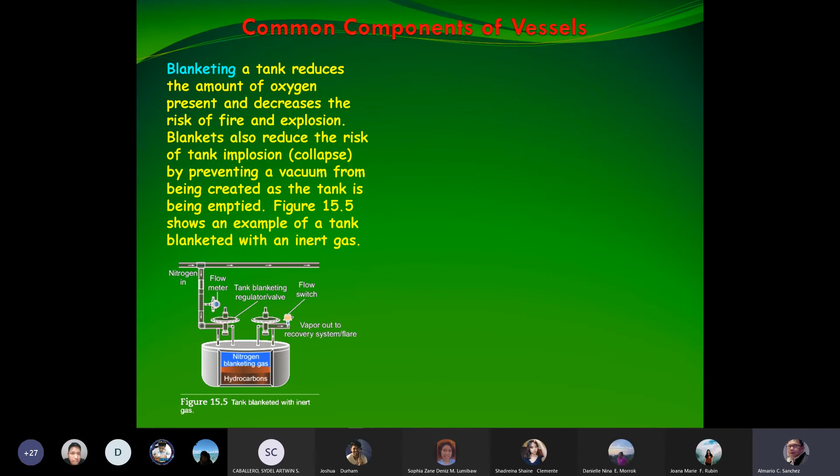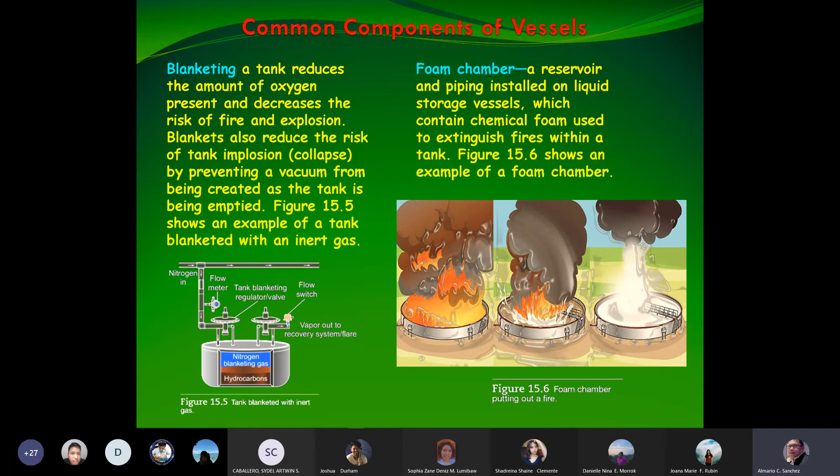Blanket gihapon. Okay, sump. An area located at the bottom of a vessel that receives and temporarily stores drainage from the lowest point in that vessel. So figure 15.7.

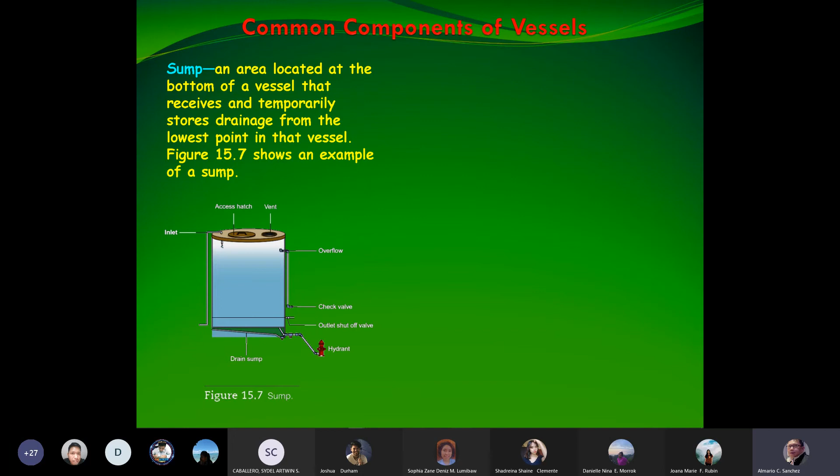So that is the drain sump. Okay? Mixer, a device used to stir chemicals or other substances. Mixers can be mounted vertically or horizontally in a vessel. Mixers can be operated at the tank site using motors located outside the vessel or be started remotely, depending on the type of service. Figure 15.8 is one.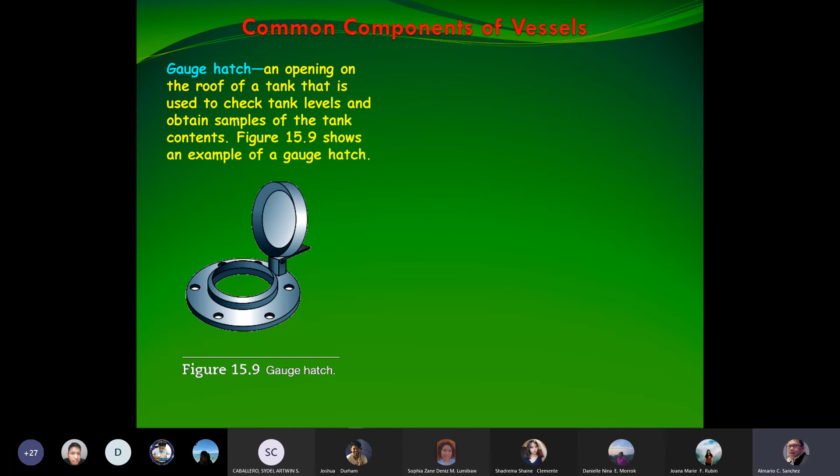Manway, an opening in a vessel that permits human entry for inspection and maintenance or repair. Most manways are flange openings located on the roof or side of a tank. Figure 15.10. So, this is the manway. Okay.

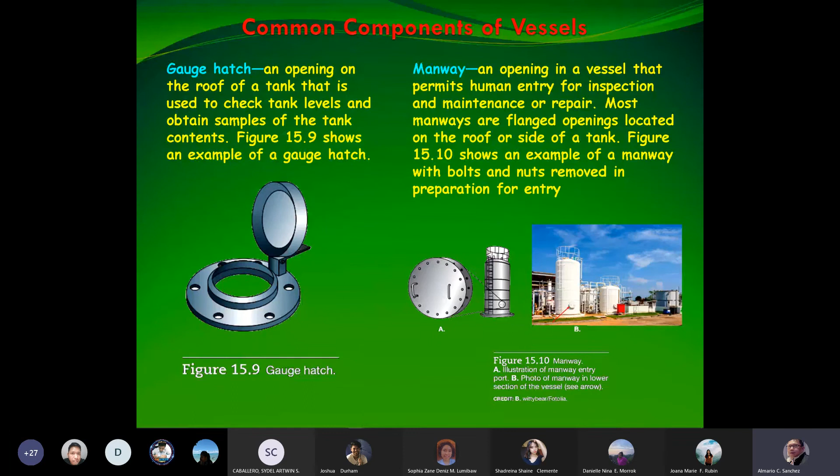Heat tracing. A coil of heated wire or tubing that adheres to or is wrapped around a pipe in order to maintain or increase the temperature of the process fluid, reduce fluid viscosity, and facilitate flow. Both steam and electrical types of heat tracing are used. Process piping using a heat tracing system is covered with thermal insulation to help maintain its temperature and also to protect personnel from burn injury.

Okay, so vapor recovery system, the process of capturing evaporated fluid or vapors in the tank for recycling into the system or for use in another area. This method employs processes such as chilling or scrubbing. The recaptured materials are then purified and the vapors or products are sent back to the process. Okay.

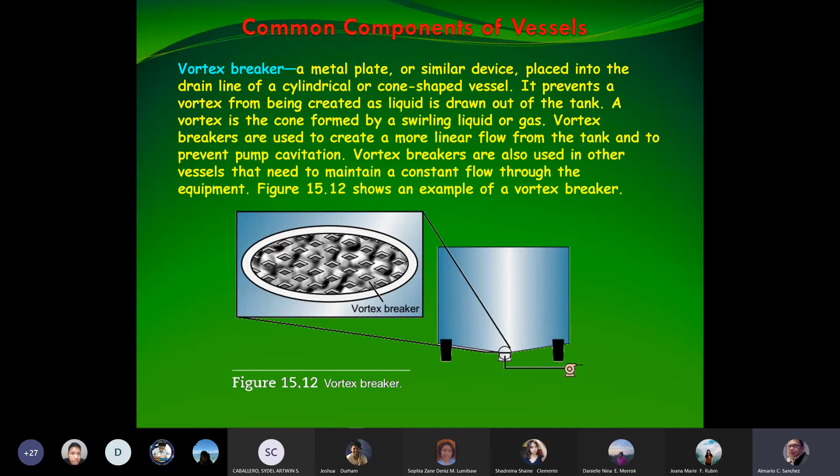So, baffle. A metal plate placed at a strategic position inside a vessel that alters the flow of the material in the vessel and can help to facilitate mixing.

Weir. A weir is a flat or notched dam or barrier to liquid flow that is normally used either to measure fluid flows or maintain a given depth of fluid. Figure 15.14. In the example, anything that is above the weir flows over.

It will overflow. Okay. Now, in this example, oil is lighter than water. It overflows the weir and is removed, with the heavier component out of the bottom. Because gasoline is also lighter than water, gasoline overflows the weir and is removed as gas out the top. This weir is used to separate three substances: oil, gasoline, and water.

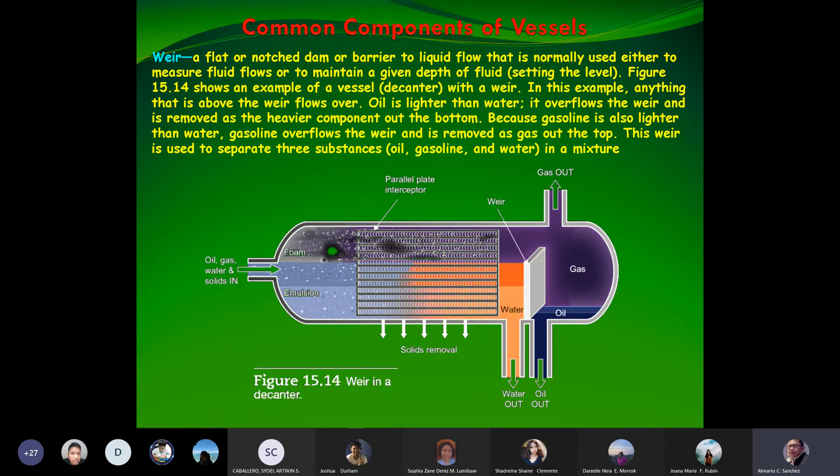Boot. Okay. A section at the bottom of a process vessel where water or other unwanted fluid is collected and removed. This area is located at the lowest section of the vessel.

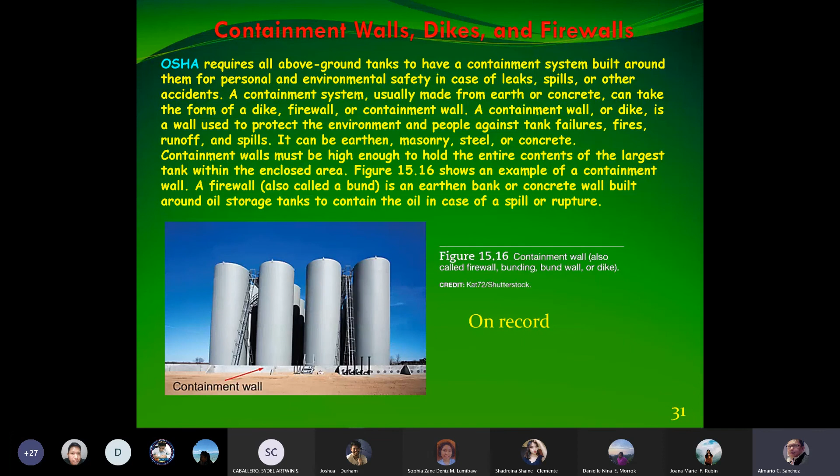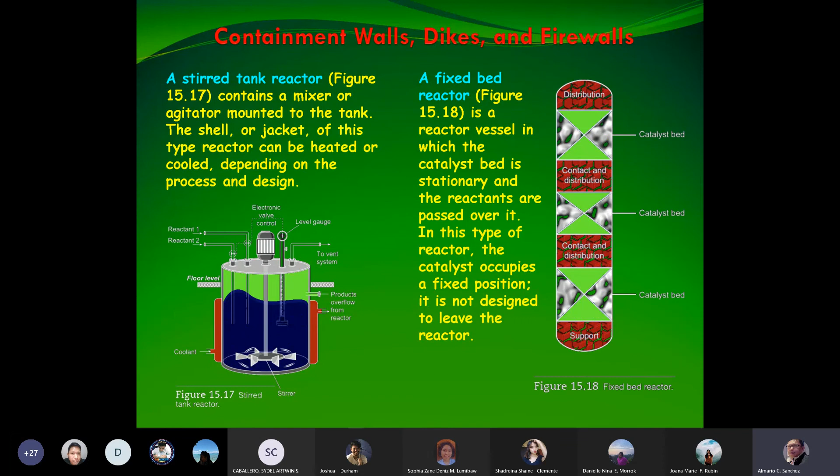So, a reactor is a vessel in which, okay, manatag-define na nato ni, no? Ibalik lang nato ni. So, stirred tank reactor, ato na ning gi-define. So, this is the stirred tank reactor. Mo ni ang design. Reactor. Don't forget ha, reactor is a type of vessel. Okay. Then we have a fixed bed reactor. Mo ni ang design. Doon na siya mga beads, no? Okay.

Then FBR, fluidized bed reactor, uses high velocity fluid to suspend and separate solids. The reactor feed is mixed with suspended catalyst where the reaction takes place. Ato na ning na-discuss kagani ha. Tubular reactor, ato na po nang na-discuss. Okay.

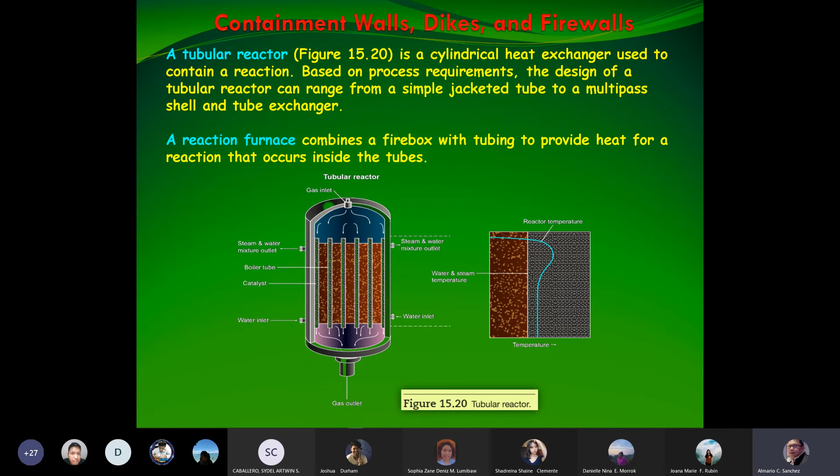Okay, so if you are a process technician, in order to accurately locate vessels and reactors on a piping and instrumentation diagram, process technicians need to be familiar with the symbols that represent different types of tanks, like the drums, vessels, reactors. Okay, example of vessel symbols.

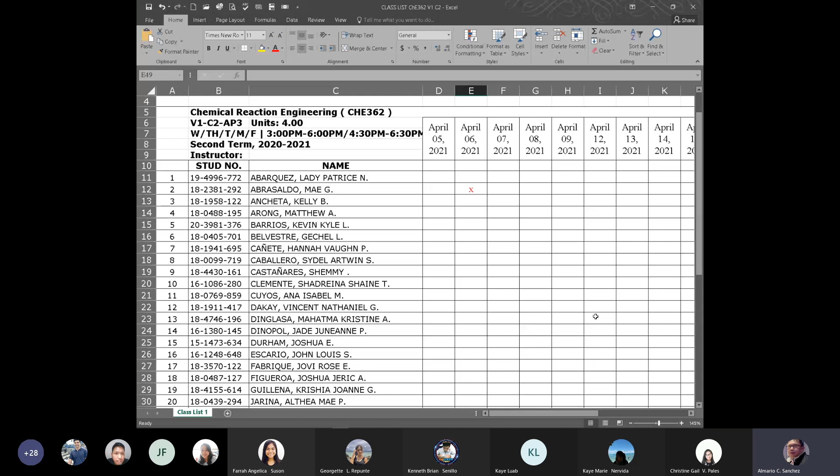Tomorrow we'll have a discussion on mole balances. Maybe by Friday we'll just have one quiz on the theories. Not the computation - the computation will be used every Monday. Okay, that's the agreement.